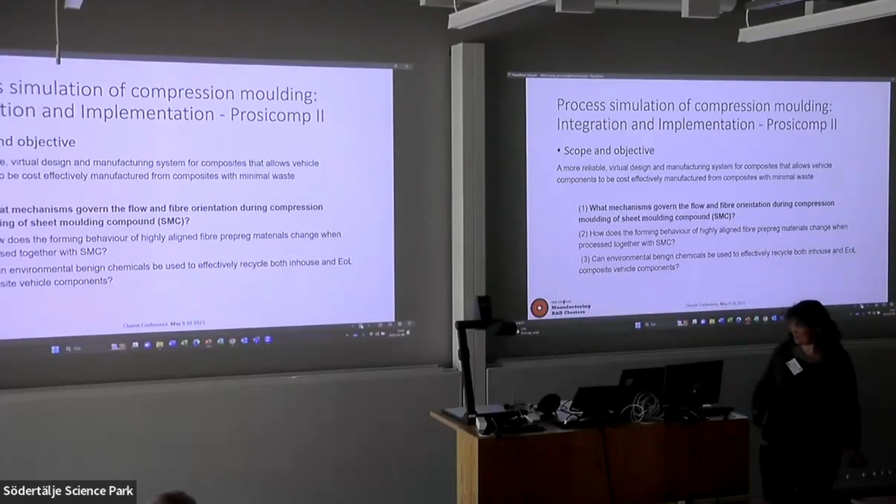And the last one is: can environmentally benign chemicals be used to effectively recycle both in-house and end-of-life composite vehicle components? That's a whole topic in itself. Like I said, we're working on the SMC part. The partners are Volvo Cars, Gestamp, Dynamo, RISE, KTH, LTU, and Torre. It actually finished in March, but with administration things the final date is in August. The work's finished now.

So why composites and why compression molding? Composites are lightweight, they have a high strength to weight ratio, they're corrosion resistant, and they're customizable with potential to minimize the number of parts. This is particularly important: we can combine a number of parts into one shot and make it in one processing step, so we don't have to go through so many joining applications as we were talking about earlier.

They're also durable. One of the biggest problems with composites is the speed at which they can be manufactured, so to address this, we use compression molding. We can get a high production rate. The tooling cost is quite low, even compared to injection molding. You get consistent part quality and a good surface finish, and the other point is high volume fraction. Compared to injection molding, where everything has to flow really easily and you can only get a small amount of fibers in there, here we can use the process with a material that has a high number of fibers.

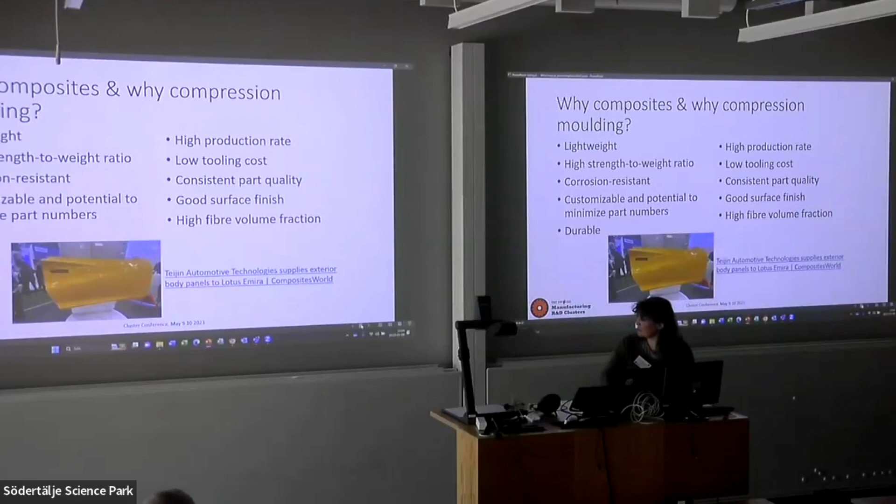High number of fibers mean we get better properties. Just to say that sometimes it feels like no one's using SMC anymore. But actually, last week, I found that there's a new body panel being produced for Lotus with a new glass SMC with glass beads in it to make it lightweight. So things are still happening out there.

What we're looking at here is predicting the effects of forming on the composite properties. What we really want to be able to do is to design the part to fit the purpose, and we want to avoid over-dimensioning. So we have new models being developed, and that was done by LTU. But we also wanted to see how good the current commercial software is at predicting the effects of forming. And then we have a demonstrator that was chosen by Volvo.

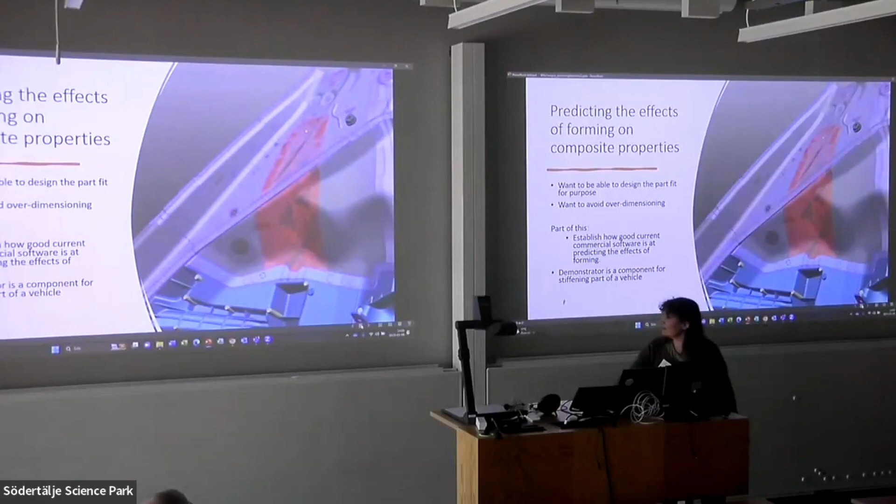This is a stiffening element in a vehicle. We chose to make it out of composites to really test how good these models that we're developing and the models that are available on the market are. So we made a demonstrator with two different positions of the charge and used it in compression molding. We used two different software for the process simulation: Moldex3D and 3D TIMON.

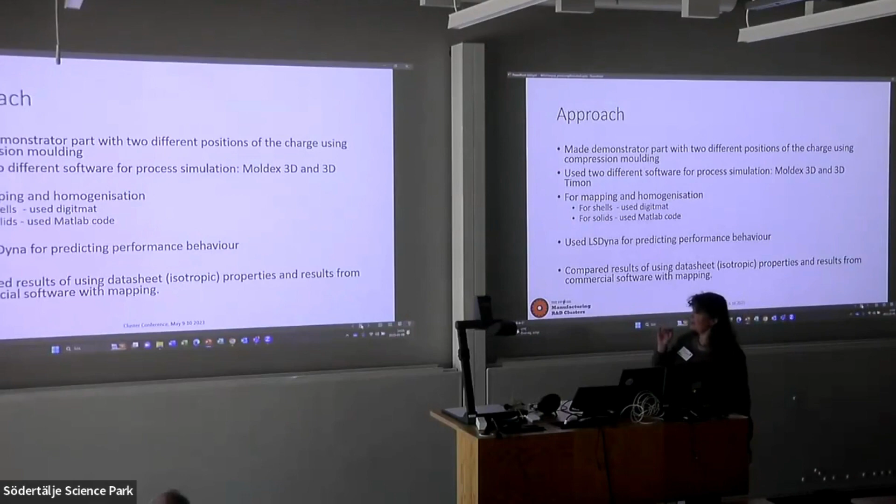And then we did a mapping and homogenization step. For shells, this was done using Digimat, and for solids, this was using some MATLAB code we developed. And then we used LS-DYNA for predicting the behavior. And then we compared the results, but what happens if you just take the data sheet that you're given and predict the properties based on that? Basically, is it worth doing all this work?

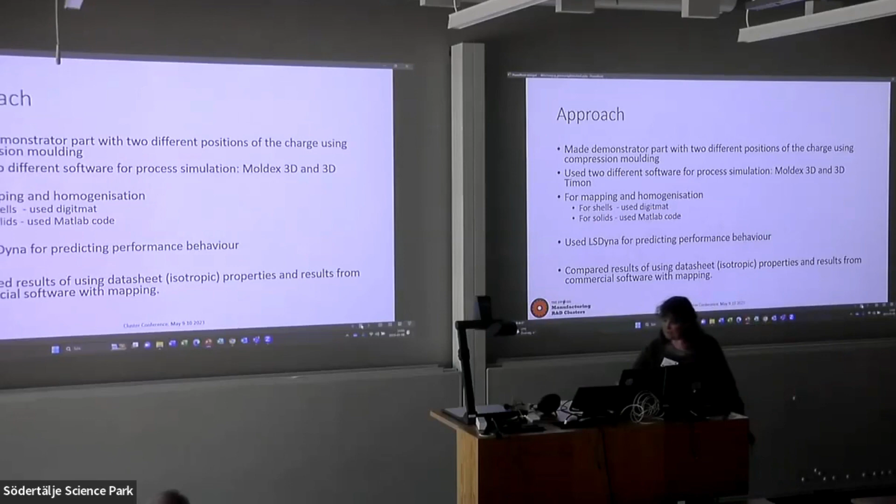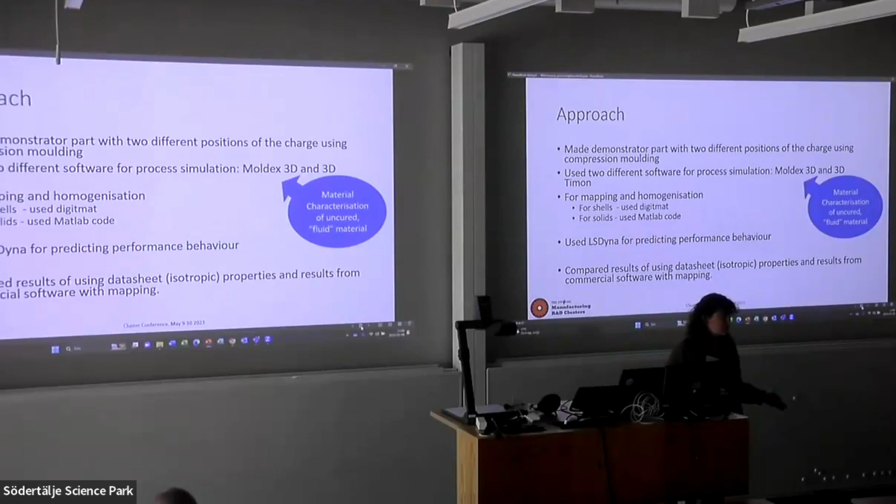The important thing there is, for the process simulation, we need to have characterization of the material in its uncured state. In both of these softwares, it's actually being modeled as a fluid, which one can have opinions over. It has advantages being modeled as a fluid. It has advantages being modeled as a soft solid. In fact, it's somewhere in between, which of course makes it challenging. The other point is that if we're using Digimat, then we also need material characterization of the solid material, which we can talk about later as well.

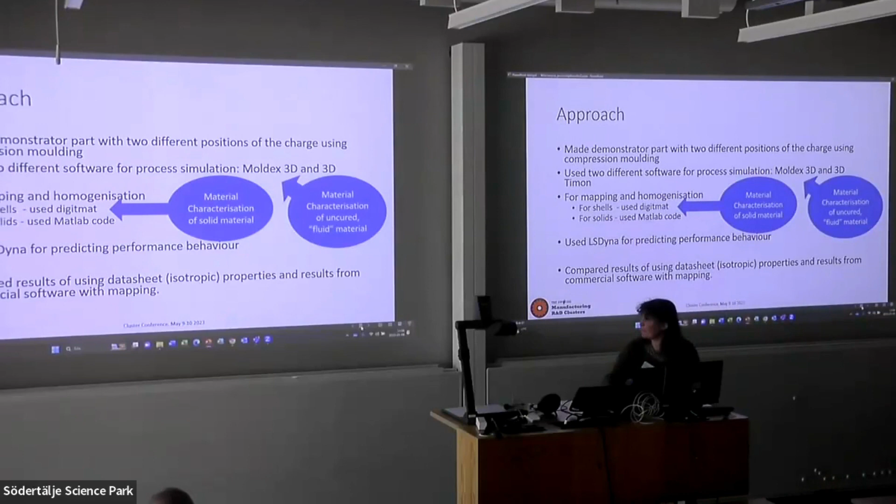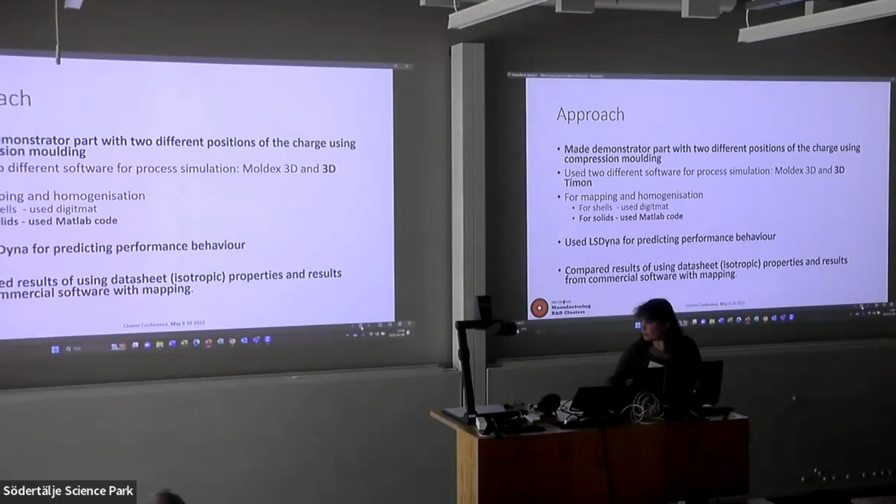So in this presentation, I wanted just to show the results of what happens when we looked at the demonstrator with the two different positions of the charge. We looked at the results from 3D TIMON, and we looked at the results from the solid using the MATLAB code and LS-DYNA for predicting the performance, and then compared it to the isotropic properties that we could use. And we still need these.

For the material characterization of the uncured fluid material, basically we're just looking at squeeze tests. The reason we're choosing squeeze tests as opposed to other types of measuring rheology is because the way in which you're testing is very similar to the way in which it's being manufactured. So even though we're characterizing it as a fluid and it's not a fluid, we have much closer models or parameters for that behavior. So this was found to give us better results.

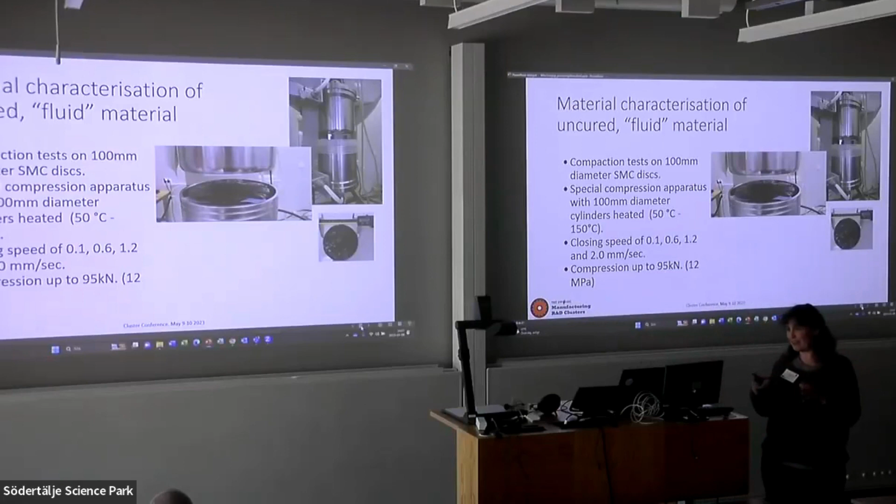It needs to be a certain size and a certain thickness because this material is inherently inhomogeneous. If we don't start taking very thin layers, we end up with very uneven properties. So it's about 100 millimeters in diameter, and only one layer, so that we don't have effects of a number of layers gliding over another, because that makes it a bit more complex. We have different closing speeds, and we have a limitation on the amount of force that we can use there.

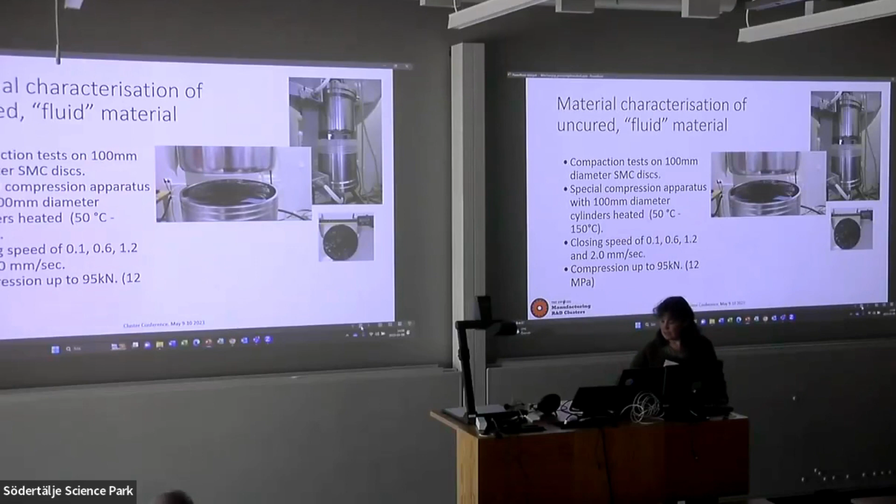So some of the challenges: the material itself is not uniform. They spend a lot of time trying to make the orientation of the fibers quite nice and even, but the thickness does vary along the sides. So that makes it difficult to characterize. The SMC cures during the test, particularly at high temperatures. So after 130 degrees,

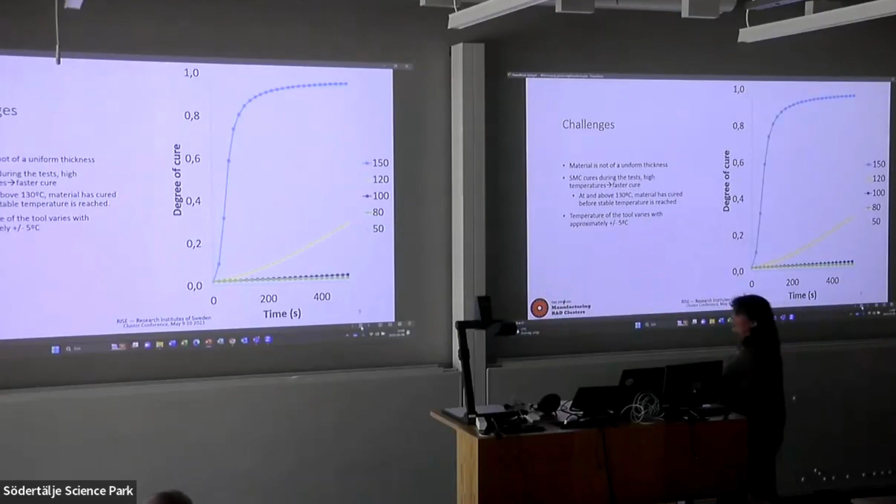we don't have enough time for the whole piece of the material to be 130 degrees before it's starting to cure. So we basically have to try and characterize it at lower temperatures and try and predict how it's going to behave. And this is the kind of Kamal's model that we're trying to use to fit. This isn't particularly an issue when it's manufactured, but it is an issue for characterizing. We have to be a bit careful. We also have a slight problem with the tool temperature, which varies approximately plus or minus 5 degrees.

So we can get how it behaves at high temperatures and how it behaves at low temperatures, but in between, due to these other factors varying in material and the differences in the tool temperature, we can't really. What we found is better is if we model from one to the other to be able to get a consistent behavior, a linear behavior, a modelable behavior.

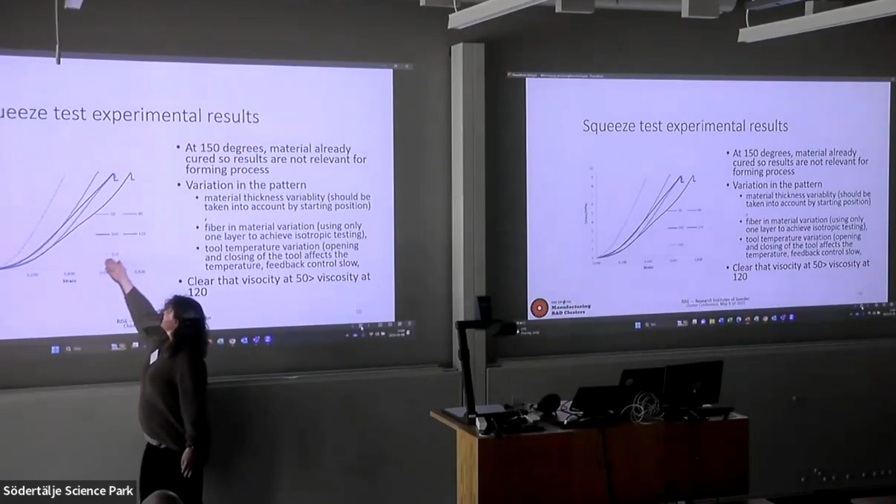You can see there are also the results of the 150 degrees. So really, if everything was going according to plan, the 150 degrees would be around here. So low stress and strain, and from that you can get your viscosity. So you expect to have a low viscosity.

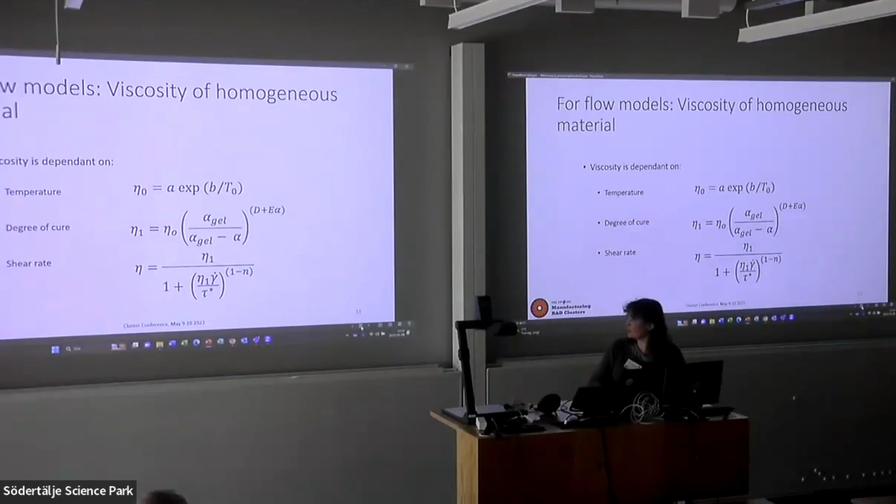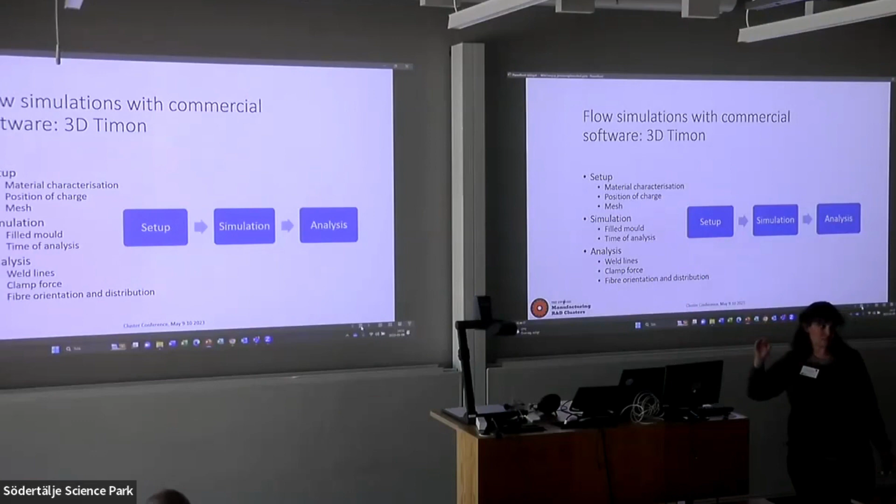The clamping force needed. This is another issue when we're looking at carbon fiber SMC, which is an SMC with a high amount of fibers. So it really requires quite a lot of force to start clamping together. And then, like we said, the fiber orientation, fiber distribution.

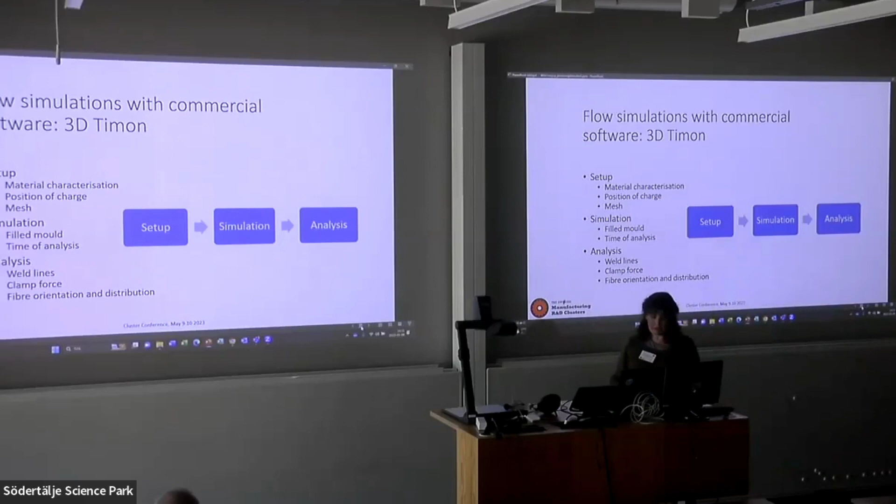One of the really important things that we found was getting the charge in the right place. So this was done really, really simply with LS Dyna, and it made a big difference to the results that we can get from the commercial software. So if we can get the charge to be in the right place at the start, then we get much better results from the software. So I think this was a key element in getting it right.

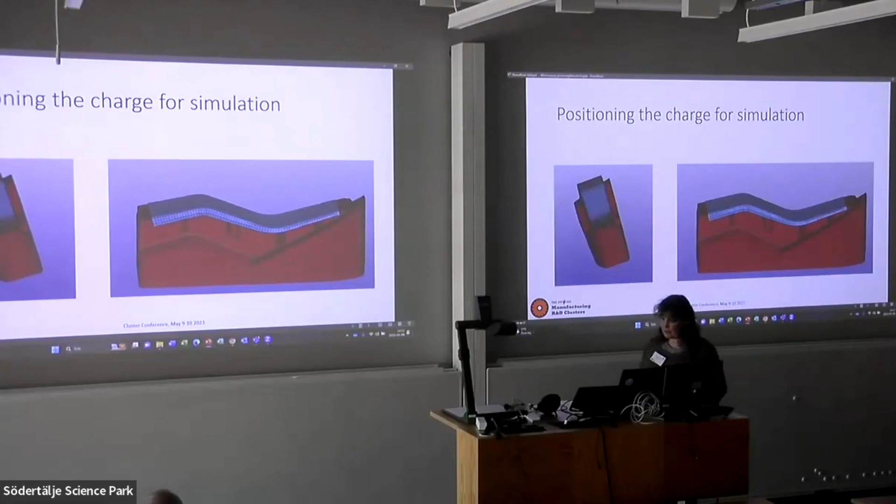It doesn't require much work to be able to put it in place, but by doing this simulation we get better results. From there, we've just made it into a thicker shell and then imported it into 3D Timon. Then in 3D Timon you can run the simulation. And here I'm just showing what it looks like when we're looking at the fiber distribution and orientation that you can get from 3D Timon.

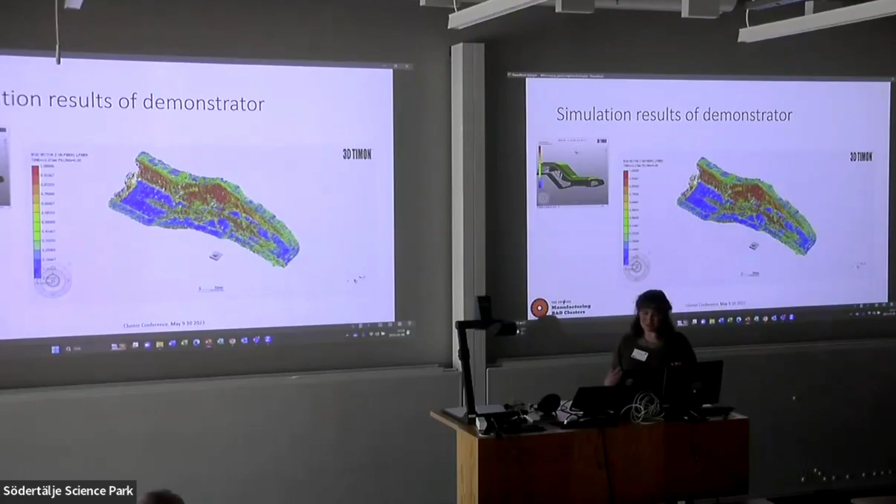3D Timon, as opposed to Moldex 3D, has a direct fiber simulation. So they do the flowing of the liquid underneath, and then they superimpose the behavior of the fibers on top of that. They're modeling the fibers as links, though they're not modeling fiber interaction, and we're talking about 35% fiber content. So you can imagine there is actually quite a lot of fiber interaction, but the standard approaches at the moment don't include it. So we try and get around that by modeling it homogenized in the fluid models.

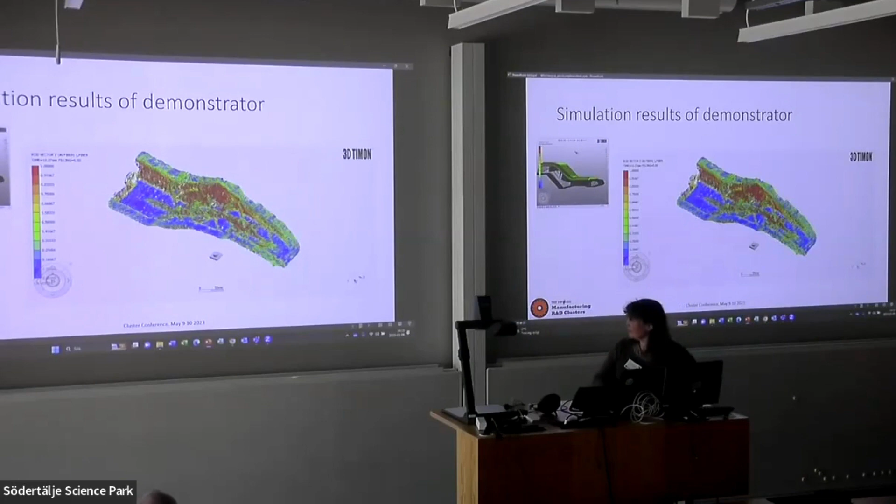Try and capture that. The next part is to take the results from that and get it into a form to be able to look at performance. So we know where the fibers are and we see pictures of it. But what we want to know is, okay, how's that going to affect the performance? To do that, we need to do a mapping. And so we're mapping the properties onto a different mesh and then doing a homogenization.

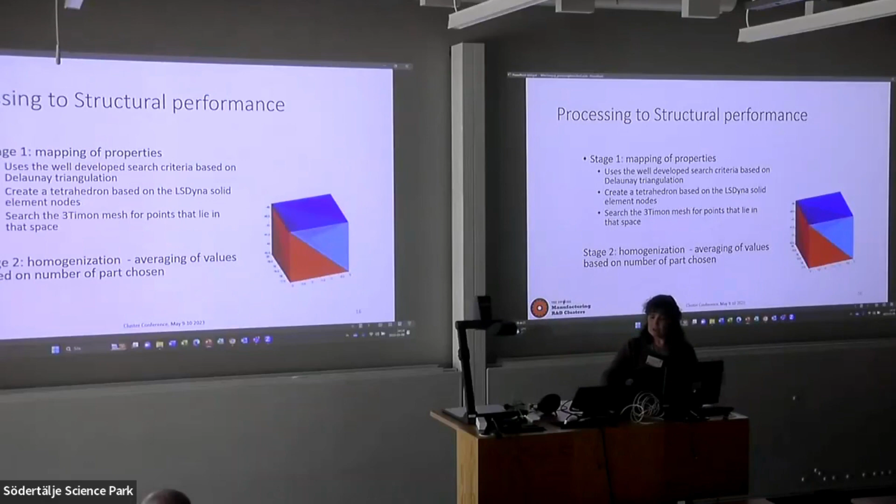So the mapping stage was done with this triangulation, creating the tetrahedrons from the LS Dyna mesh and then mapping the 3D Timon values onto that one. And then in this case, we just average the results in these different parts. So this is the same part now divided into a number of different parts, and each part has different mechanical properties.

And the number of parts used here is 10, but you need to check to see what is a good number of parts to use. It will depend on the application and on the materials used. 3 could be enough, 20 might be needed. But in this stage, 10 was the one where we didn't see much difference. We were looking at the stiffness and we didn't see much change in the stiffness.

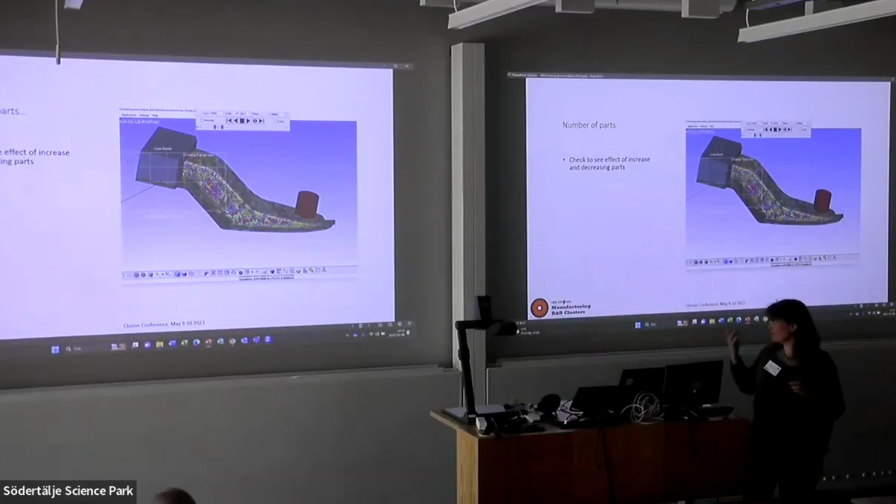I don't know whether this is, yeah. So this is what we're then using to test, to compare against the actual test. And what we can see here is the crack at the top. I don't know whether I've got a pointer here. Pointer's not working. There we go.

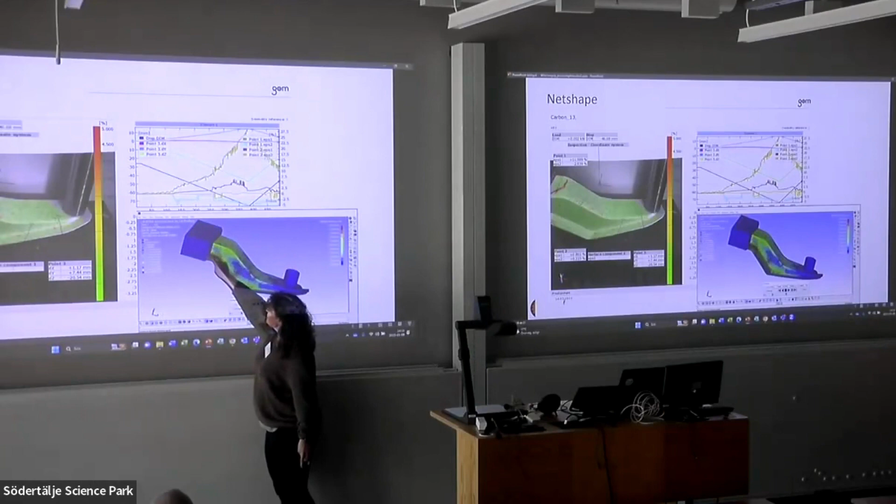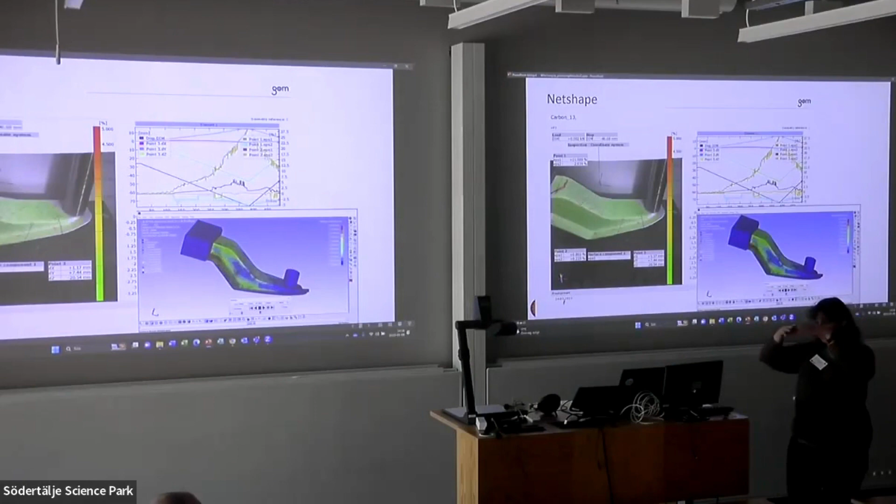So here we have the crack, and we do see that there is a high level of stress at this point, but there's probably a higher level of stress at that point. Some of them broke up here and some of them broke up here. So we're not too bad in predicting where the highest amount of stress is going to be. This was done for the net shape. The net shape means that the material drapes over the tool, and it was compared to a block where you just put a stack on top.

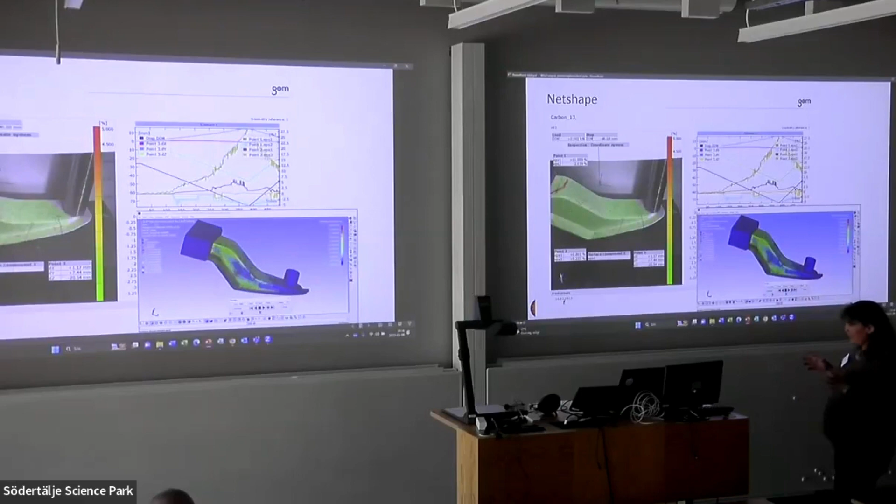One of the biggest problems is that the SMC looks like it's working. If you put the charge pretty much anywhere, you can push it down and it will pretty much fill up your whole mold. What we see is that if we place the charge in different places, in different stacks, in different arrangements, we get different mechanical properties. So if we want to reduce the variation, that stack really has to be controlled.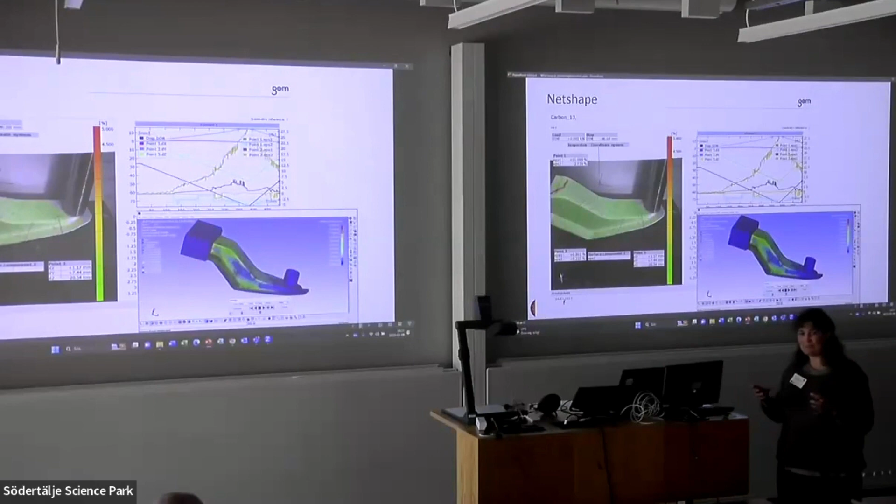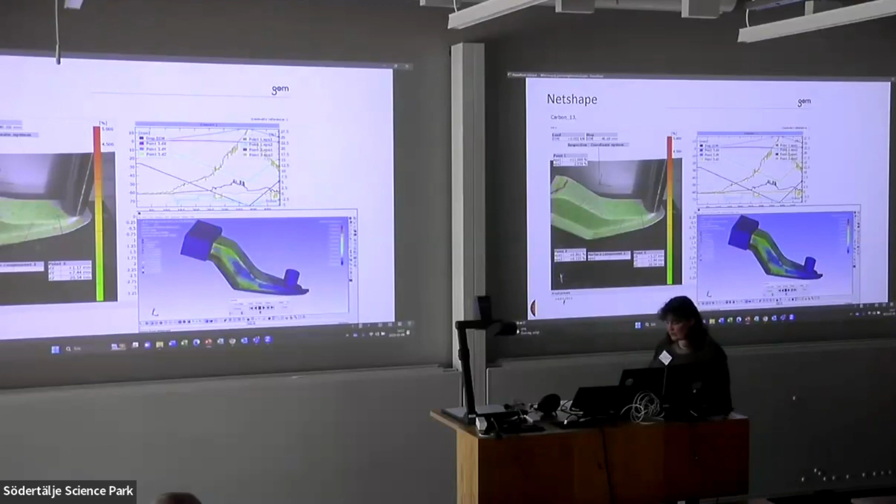And sometimes it can be a little bit difficult convincing the people who are making it that this actually makes a difference. But it is important that it is lined up; ideally we used a laser for this and made the stacks very even. This does have an effect on the properties and on the variation. And the block looks something similar. Again, the highest stresses are at the point of cracking. In this case it's a bit unfortunate. The crack does start at the bottom at the same point and goes up.

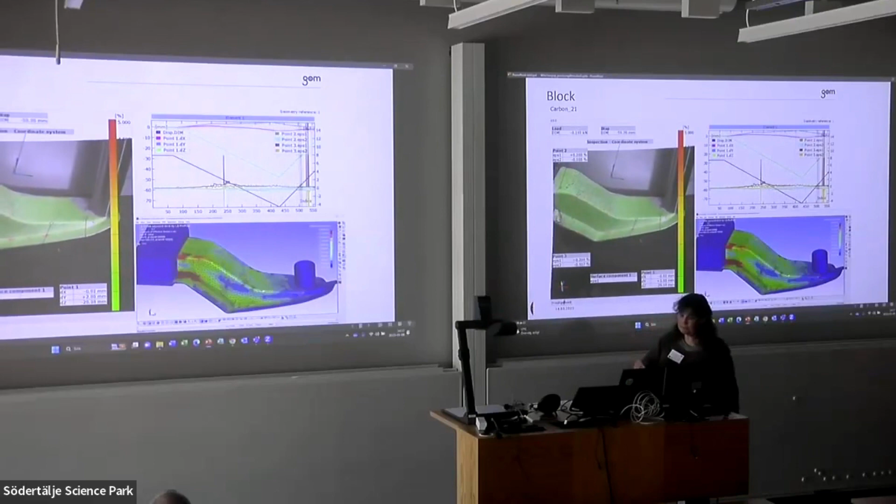So we looked at the prediction of the global stiffness. The blue line there is using the isotropic properties. It didn't make much difference; they all look pretty much alike. But if we look a little closer and take the linear part, we can start trying to decipher a bit more what's going on. For the net shape, there's much less variation, which is what you would expect because you've already draped it, so there's much less chance that it can vary. And it's also much closer to the isotropic values.

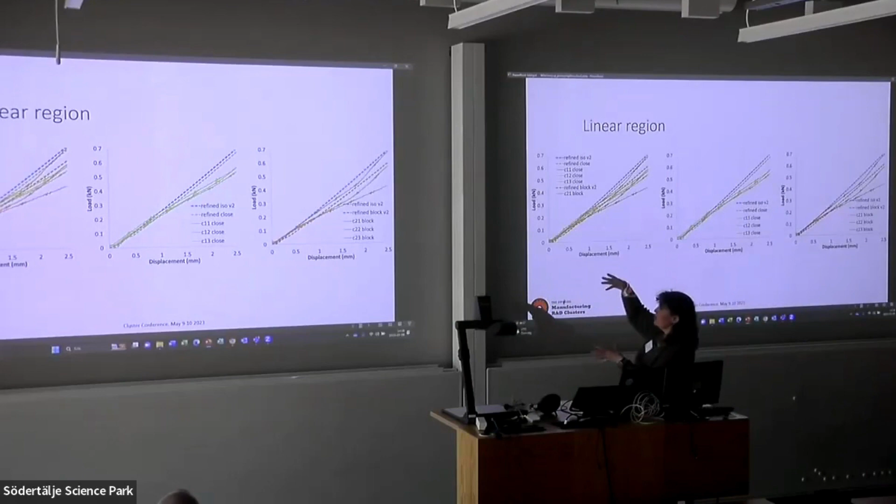Whereas if you're using a block, yes, you will fill the whole thing, but there can be a lot of variation in the experimental results. Looking again at the stiffness, the variation was less with the net shape than with the block, and the prediction using the process simulation was a bit closer in both cases, but of course it makes much less difference to a net shape than it does to a block.

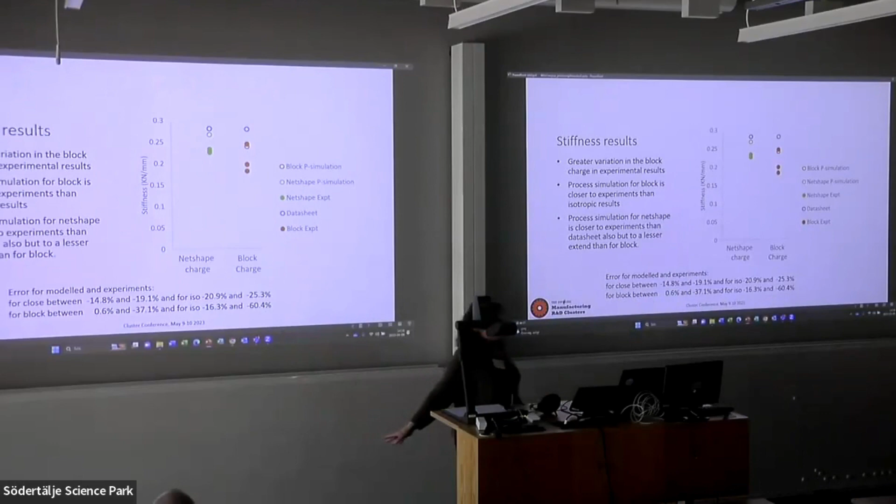So I was looking at some of these tolerances. This is worst case with only 1 degree. This is 60% wrong, so we really need to get this variation down. If you're using your data sheet, you could be out by 60%. We can make it slightly better, bringing it down to 40%, 37% with our process simulation. But we still need to look much more closely at the material and at the position to get this variation down, because at the moment, we can model it any way we want, and we're going to be closer than the experimental values. So there are other things going on here.

We're also looking at what's happening with the fiber orientation and the analysis. But the other thing we can see is that the net shape, and I've tried to show which area it was taken from, just showed a normal composite strip, but in the block, you can see there are some cracks in this part as it's being pulled down. This is nothing that you can see on the surface. It looks fine on the surface, but there are cracks in different places where the material has strained.

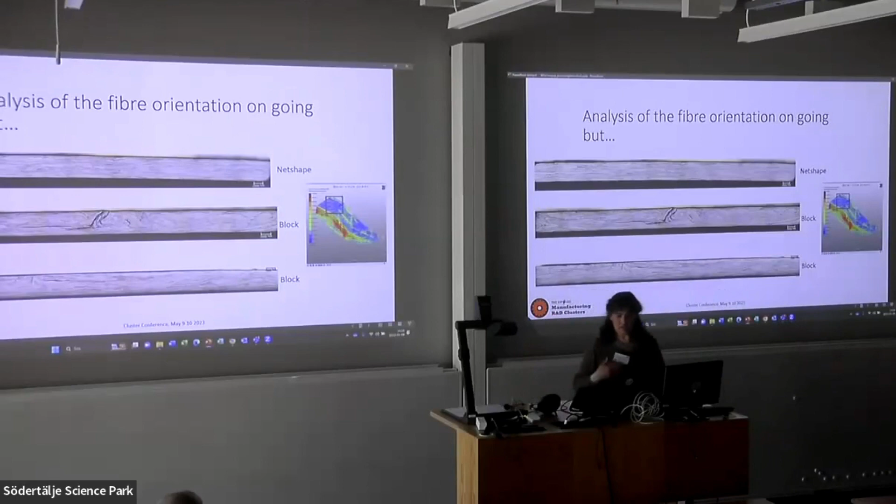And this, I think, would be a really important thing to capture in our models. I tested the whole thing on another geometry, actually. So this is from the Prosecom 2 tool, just to check the models were working. We did the same thing: modeling the flow, dividing it into parts, and doing the prediction.

But then I changed. The first one was allowing the fibers to move quite a lot, allowing up to a 65% volume fraction. That gave the line that was too high here. The green line is the experimental results. 50% was about right.

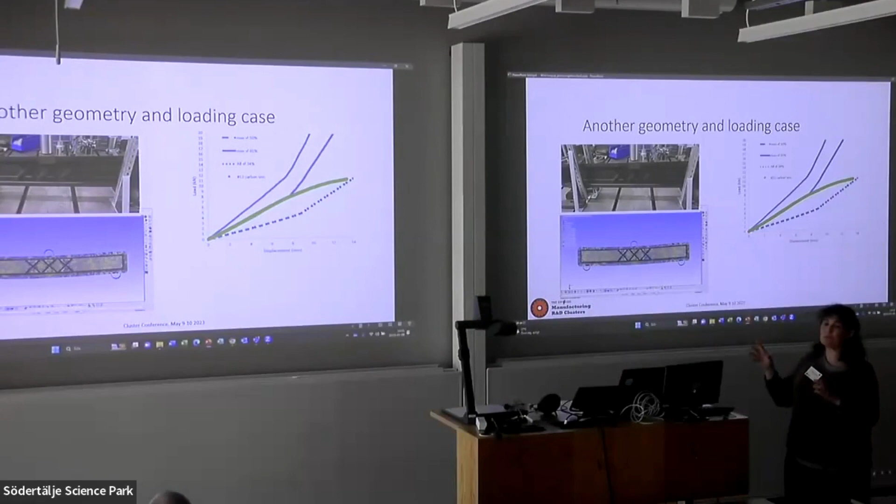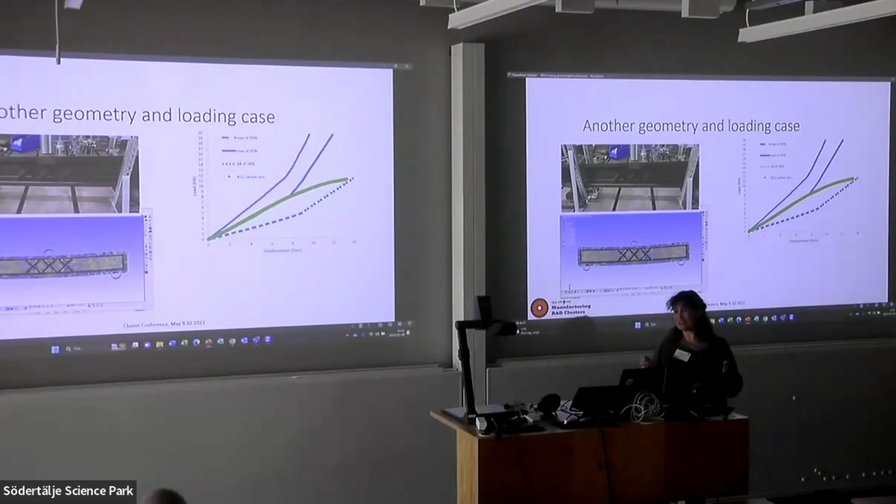And if we use isotropic data sheet values, then we get a line that's quite a lot lower. So here we can see that in this case, with this loading case, it's much clearer to see differences between what an isotropic model using data sheet values and using the process simulation values would give. So the way we tested the Procicom 2 tool actually wasn't the best way to show the benefits of using a process simulation tool.

Conclusions. I presented this to Toma, who works a lot with failure. He said, well, it's a lot of work for a straight line. But we're hoping that this straight line is in the right place, and it's getting closer and closer to the right place. And then of course we can add failure and get some more interesting curves. The results have some good agreement for the different geometries and the loading cases.

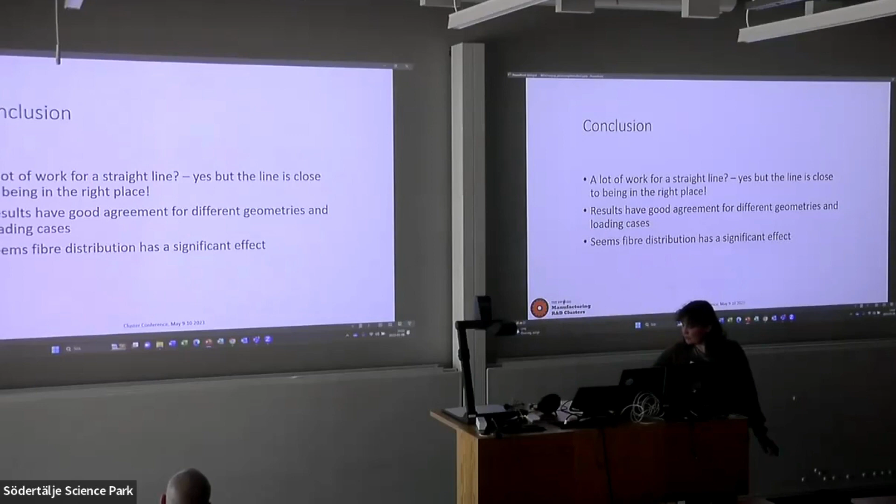And the other thing we can see, if we allow 65% versus 50%, is that the fiber distribution really has a significant effect on the results. Which is kind of what you expect, but I think it has more of an effect than the orientation itself.

Remaining challenges. Well, I think we need to capture these fractures that are going on in the forming process. I was hoping that this would be something to do with the stress that you can capture in the flow models, but that's not the case. So I don't think the flow models are good enough for capturing those issues.

And the other thing that we're doing is looking to see whether we can do this using Dyna all the way through, even in the forming process. And there, I think we might have a better chance of capturing this tearing behavior and moving behavior when we're no longer modeling it just as a fluid.

We're going to compare it to the results from the shell models, but I already know the results from that. The shell models are much better if you use Digimat. That's not surprising, because you calibrate the final material. The advantage of using this model is that it's done in a micromechanical model, so you can test a few different fiber volume fraction options.

We want to have the least amount of fibers possible, because then it flows really nicely and you have much less issues. But you want to find out where that boundary is. By using these models, at least we can get a first stage check: yes, it looks like 40% is going to be enough, 20% is going to be enough, or what the issues are. And then you can go on to using Digimat and get a better result from it. And like I said, we would like to look at using LS Dyna for forming.

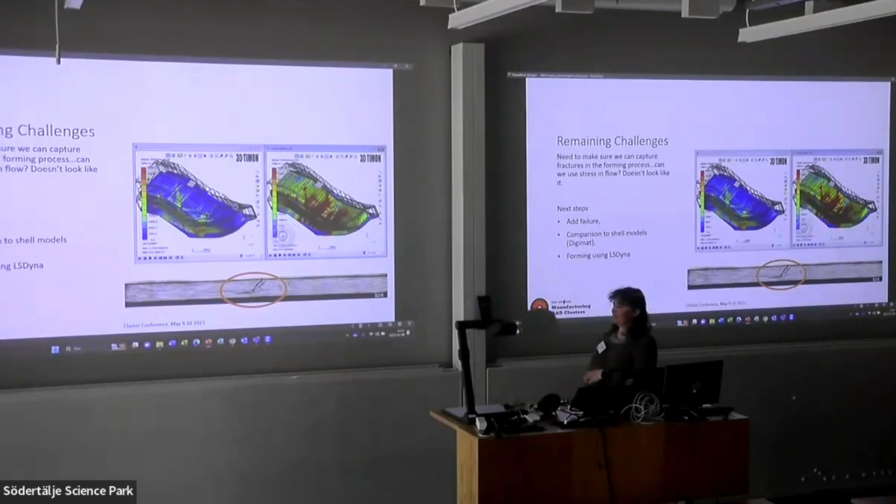There's different ways of going. One is that there is the chemical process that we can use with a thermoset to break it down. But that was like the most complicated of the plastic solutions that Matthias presented this morning. So this is where you use chemical recycling and break it down. But you don't have to go down to the monomers. Well, anyway, you can get some really good fibers from that. That works really well. And pyrolysis also works nicely with carbon fiber. Unfortunately, it doesn't work very well with glass fibers.

So then the other thing is, anything you do to recycle carbon fiber is a saving, because they use a lot of energy to be made, and they're expensive. So anything you do is worth it. Glass fibers are so cheap and the processes for recycling are so expensive at the moment that it's a very difficult balance to get. Okay, so that's for thermosets. Whether we're using a thermoset or a thermoplastic doesn't really matter for these kind of simulations. They're the same kind of simulations.

So in the next project we're looking at thermoplastic with Volvo, and the recycling. Well, it's not quite as reformable as a pure thermoplastic, because you've got the carbon fibers in there. Most of the time, it's chopped up and used as pellets. So it's not recycled to the same level, it's downgraded. And again, if you wanted to recycle it to the same level, you'd probably have to do a chemical separation again, because you want to have the long fibers to be able to use them again.

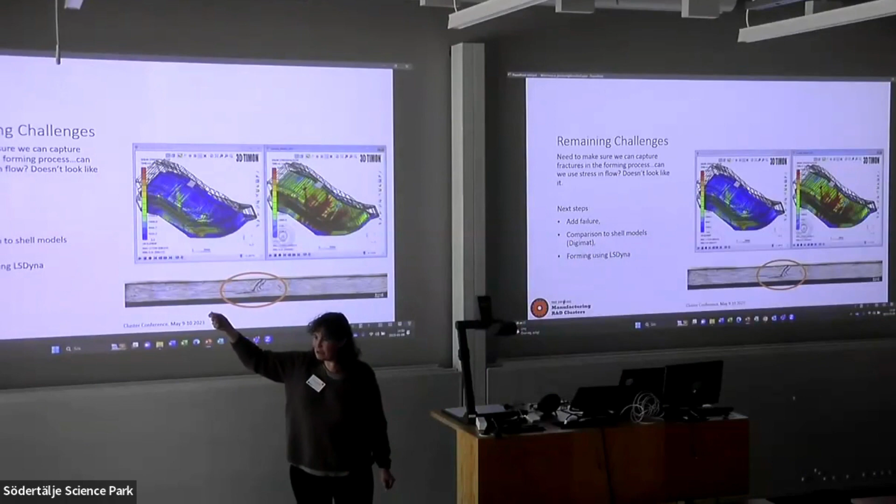So you're saying one lasts very long and it's saving a lot of fuel. Yes. That doesn't mean that we shouldn't take what is left, but maybe it's not as important that it's recycled to exactly the same level. Maybe we can afford to go down a level when it is recycled. Thank you very much.

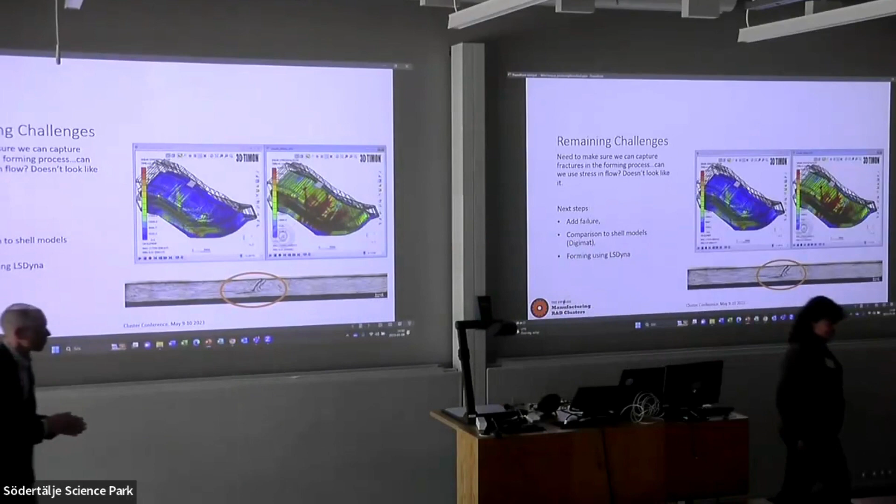Are you ready? Great. So let's see if we can find it.